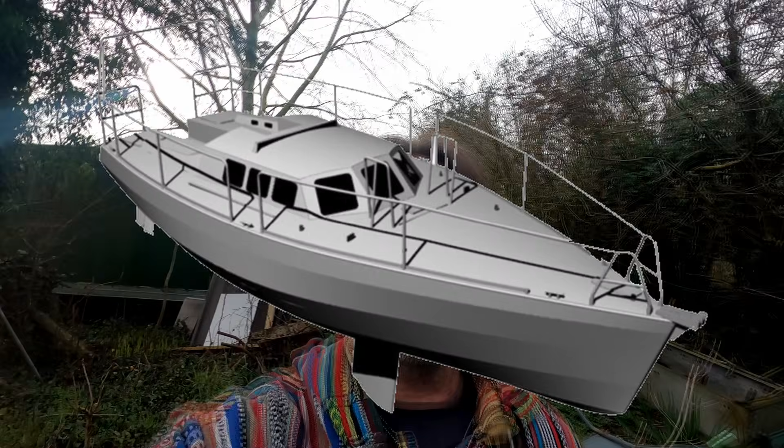Welcome to episode 24 of the KoBg 36 aluminium boat build. This is the channel where I'm trying to build a sailboat in my backyard. In this episode, we'll be looking at the hard dodger side window ledge and the window itself, and also the cost tracking of stage 23.3, which is the bow and the bow rollers. So let's take a look.

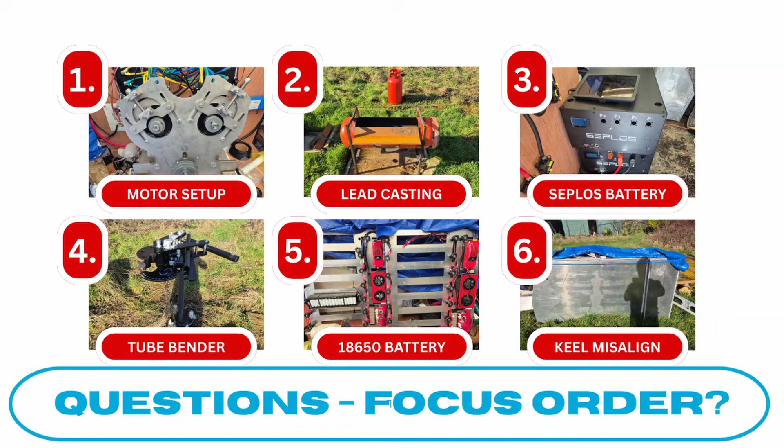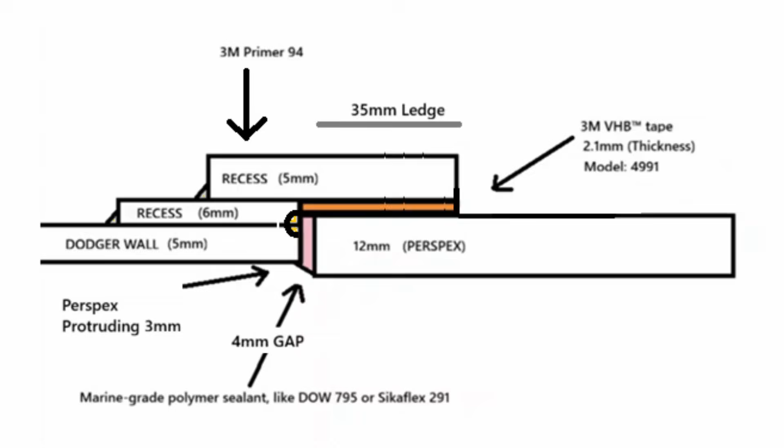With the recess welded to the hard dodger, I have now been able to push forward with the window ledge needed, as well as the redesign of the actual window to give me a 4mm gap between the window and the frame to cater for thermal expansion that happens to acrylic. In my previous design, it was 3mm and it was potentially too tight. This is the total design incorporating recess layer, ledge and the actual window.

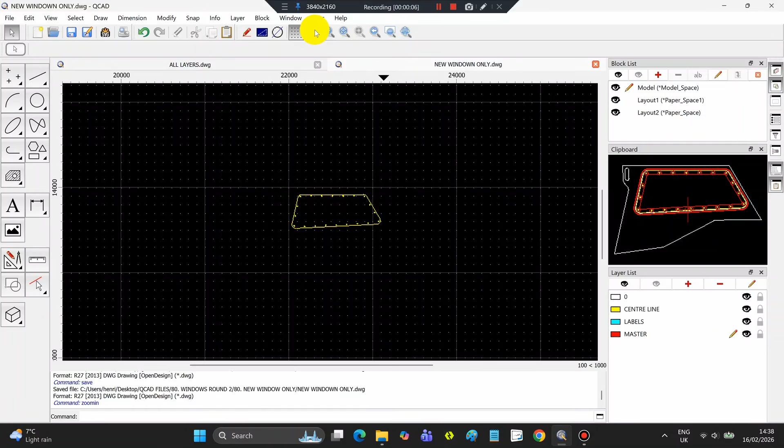This is the window only, lifted out so that it can be sent on to a plastic company to cut. Now I have 130mm between bolts instead of one in each corner that I had in my previous design. I guess better safe than sorry.

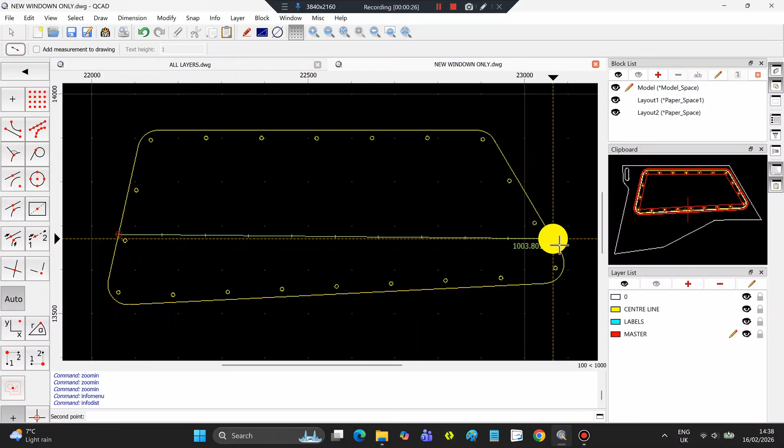The ledge that the window is resting on is 35mm, and then we have the 4mm gap for the thermal expansion, and then an additional 11mm to weld against the recess layer.

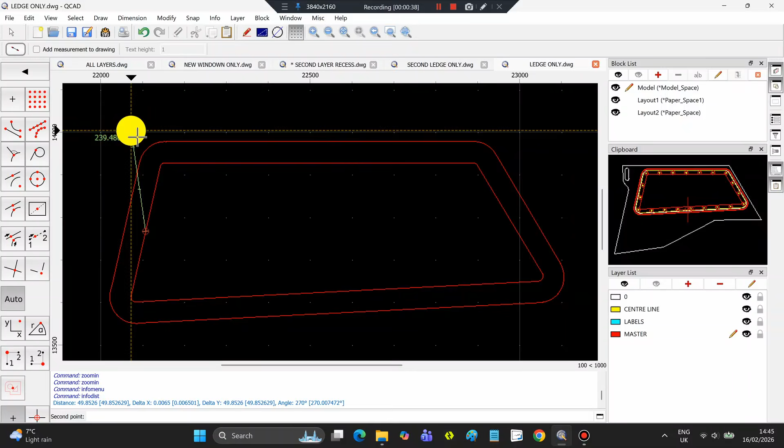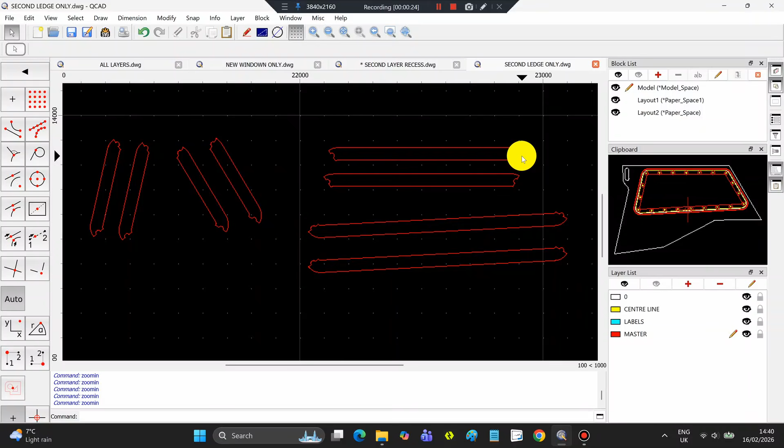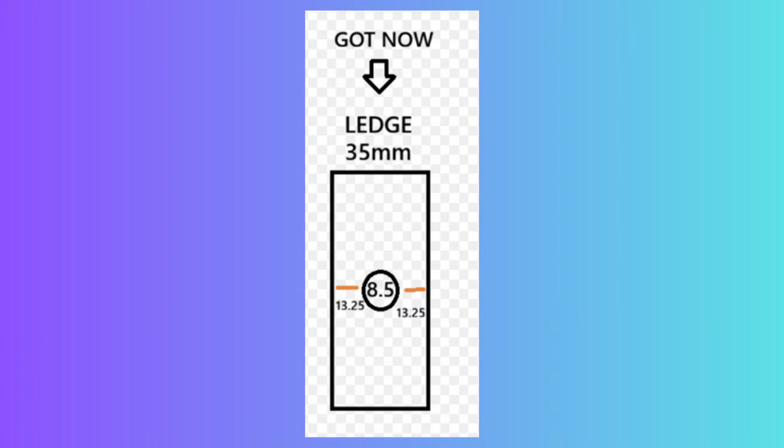This is the same ledge cut into smaller parts for laser cutting, also added some keys for easy assembly. Note, I've yet to send this one off to be cut, as I found information indicating that the distance from the window edge to the bolt hole edge should be 2 times the thickness of the window. In my case, that is 24mm, as I'm using a 12mm window. Today I have 13.25mm. I'm asking a window fitter engineer, and if he tells me that the ledge needs to be wider to move the holes in further towards the center, then there will be a version 3.0 on this one and a new redesign.

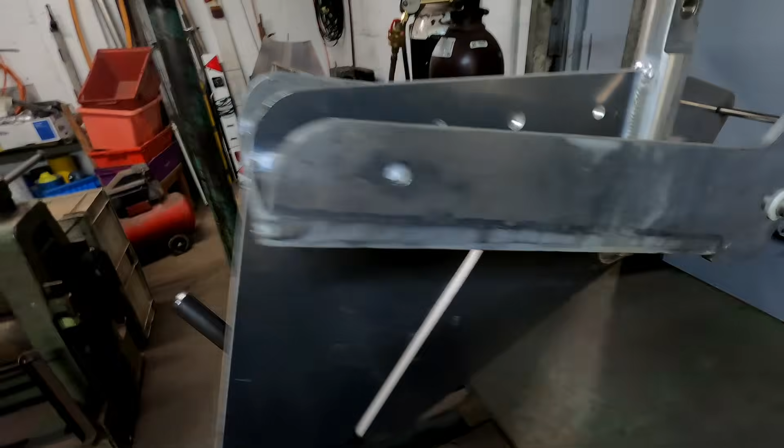In episode 21 and 22, I covered the parts of the bow that now have been assembled and welded in place, as well as the bow chain plate. The next step is to add the IC flooring, the support and the first bow bulkhead, something that can also go on at this point.

Stage 23.3, bow and rollers. Parts and materials came to 887.29 Great British pounds, roughly 1,210.21 US dollars. That accounted for 68.53% of the total cost of this stage, mainly the aluminium 5083 used, some round acetal rods for the bow rollers, and the stainless steel rods for those rollers as well as the cotter pins.

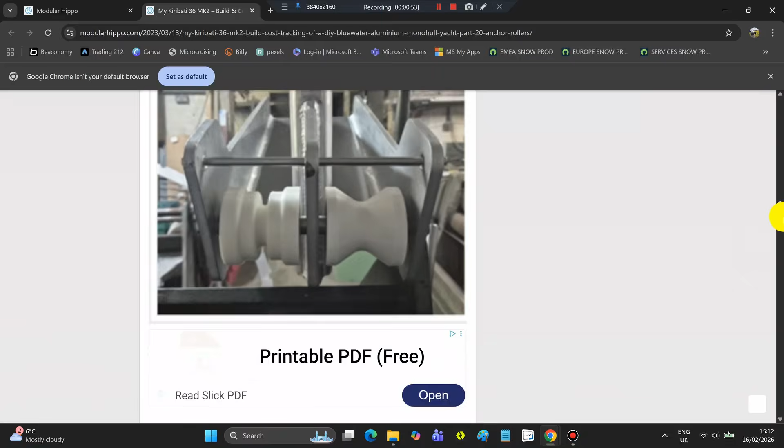External labor came to 341.23 Great British pounds, roughly 465.43 US dollars. That was 26.36% of the total cost of this stage, mainly the laser cutting, the lathing of the acetal rollers, and the drilling of the cotter pin holes, as well as the welding.

Tools and miscellaneous for this stage came to 66.18 Great British pounds, roughly 90.27 US dollars, which is 5.11% of the total costs. Drill bits, ASA 3D filament for rollers was the tools and miscellaneous.

Total cost for this stage came to 1,294.70 Great British pounds, roughly 1,765.91 US dollars. Reflection on this one: the cost included 2 sets of rollers, as I printed one set in ASA material and the other one I had made in acetal plastic. Also, if I had all the tools and skills, then I would have saved myself 31.47% of the cost, which is roughly 407.41 Great British pounds or 555.70 US dollars.

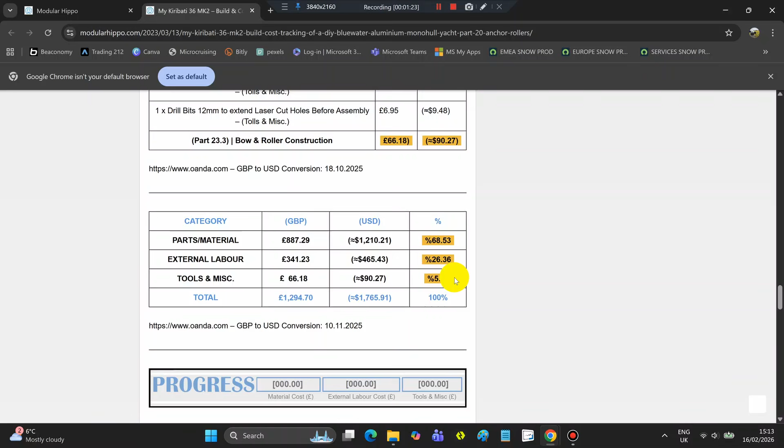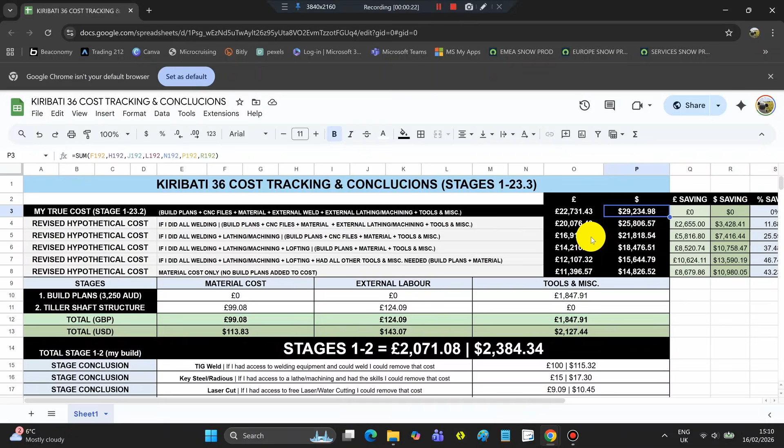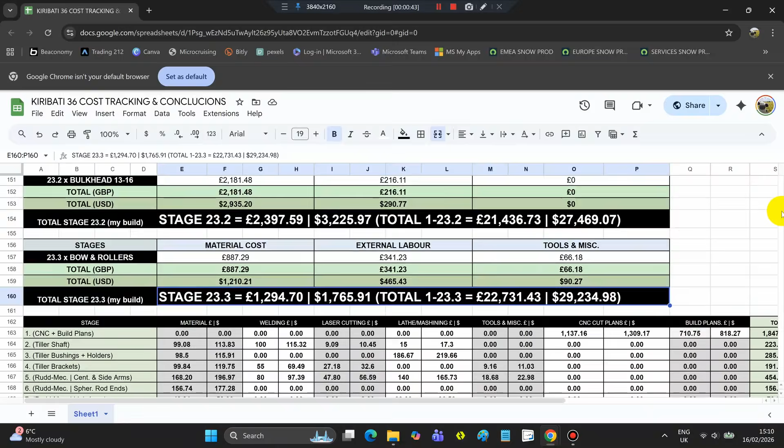Conclusion: I guess one conclusion is that there are more than one way to skin a cat. Although not tested in the field yet, the ASA printed bow rollers look sturdy enough, so I have high hopes for those. With the below added: material 887.29, 1,210.21 US dollars, welding 190 pounds, 259.15 US dollars, laser cutting 91.23, which is 124.44 US dollars, and lathing 60 pounds, which is 81.84 US dollars.

Tools and miscellaneous 66.18 Great British pounds, which is 90.27 US dollars. The total cost so far for all stages has now reached 22,731.43 Great British pounds, roughly 29,234.98 US dollars. That brings the percentage divide into parts and material now at 50.14%, welding external 11.68%, laser cutting external 6.89%, lathing and machining 13.91%, and tools and miscellaneous 9.25%, and the rest is the build plans, which is 8.13%.